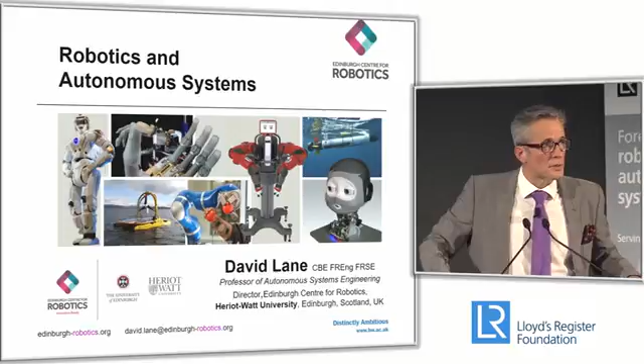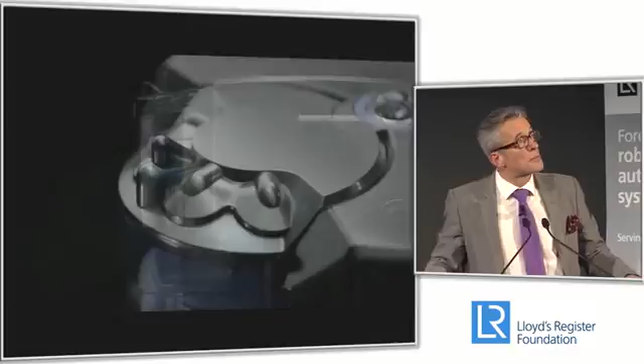So just to dance through a few examples, I'm going to cut some of this stuff out to keep it moving. Can we switch the sound off, please? Thanks, that's great. Just to show through some examples, by the happenstance of cut and paste from another presentation, these are all British examples, but I'm conscious that Lloyd's is a very international organization, so don't read anything into that.

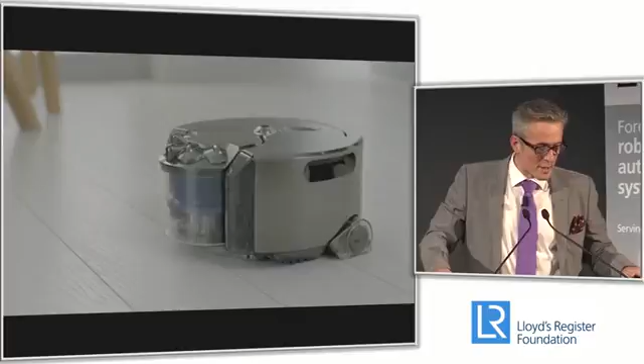Here's a great example of a robot and an autonomous system: Dyson's new vacuum cleaner. It has that thing on top there, which is its 360 Eye camera system, which it uses to navigate and map your room so that it can vacuum it successfully. If you talk to Sir James Dyson about this, he always jokes about what they're doing with all the data they gather from the vacuum cleaner back at Dyson HQ. You might care to think about that if you choose to buy one and use it in your house.

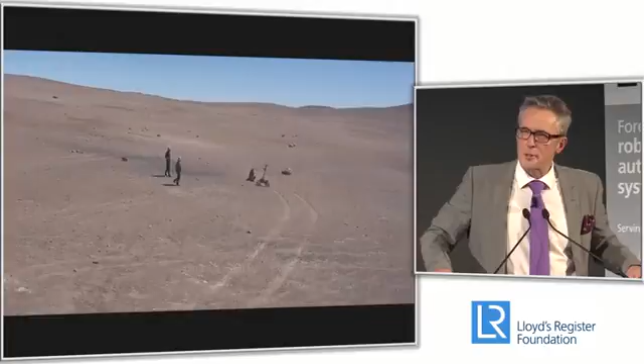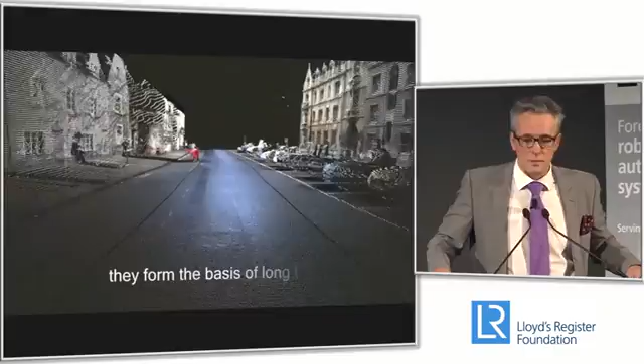Driverless cars are big. There's a set of trials going on at the moment in Milton Keynes. Ruth again was kind enough to point out that in the news last week, it was announced that they were being successful, avoiding both a dog and somebody playing Pokemon Go. So one of the issues with driverless cars is how well they can sense their environment and avoid obstacles. There's more trials going on later this summer in Greenwich—living lab type stuff. So these are coming.

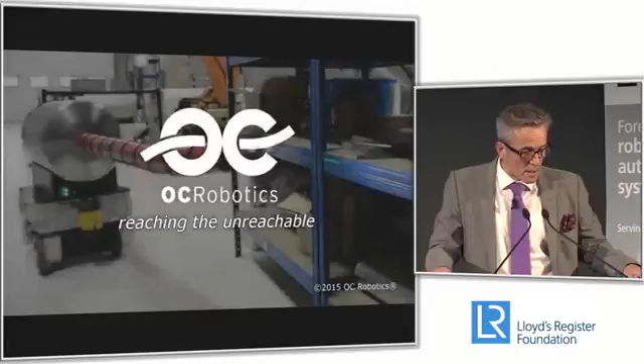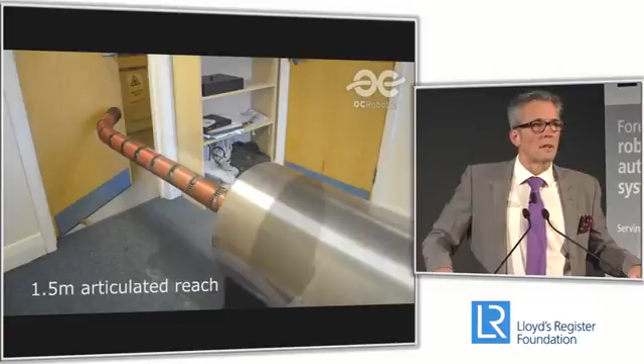OC Robotics, a British company, producing snake arms that are being used for inspection, and a lot of the kinds of integrity management and asset integrity solutions that require inspection use this kind of technology. We're getting better at it, making it cheaper, more affordable, and less power hungry.

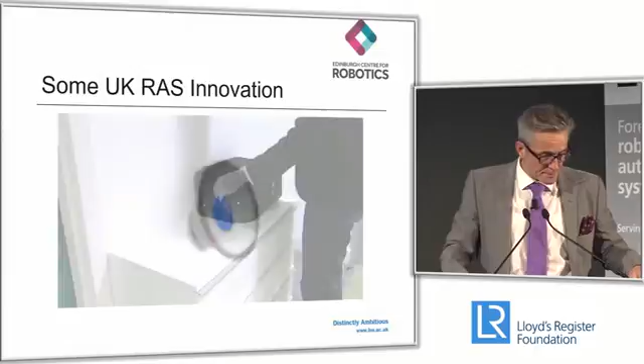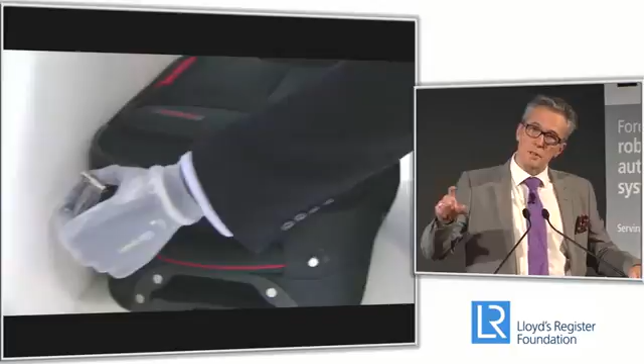This is an Edinburgh-based company, Touch Bionics, doing prosthetic devices, most notably hands, and this is one of their latest, the i-limb. It has some intelligence inside the hand—it's very difficult to build good sensor connections to your muscles so the hand understands what you're asking it to do. With very simple connections to your nerve, not directly to your nervous system but through your skin, you have to produce a series of different behaviors from the hand in order for it to do different operations. Touch Bionics have one of the most successful examples of that.

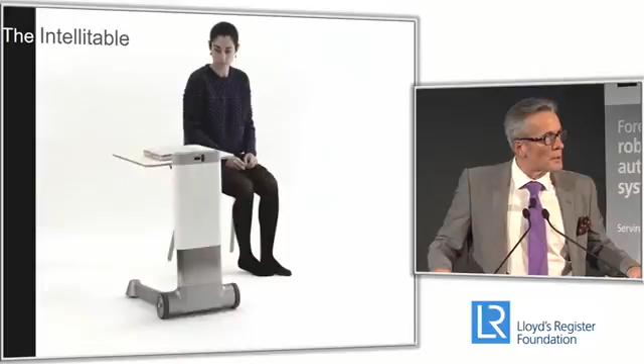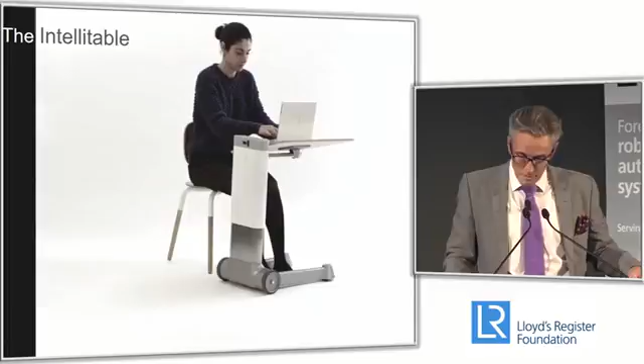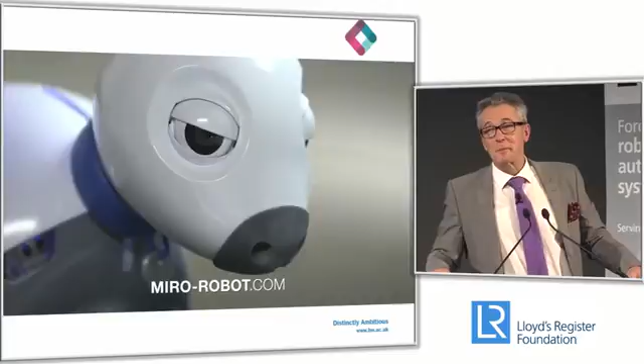This is a Consequential Robotics product, so I should be careful what I say—it's Intellitable. Sometimes the robotics revolution is revolutionizing things that don't move into things that do. This is an example of assisted living in a care home environment, and the next generation of this will have a small manipulator on it so it can pick things up and do things. Companion robots are becoming popular. We anthropomorphize our robots unbelievably, and there are legion tales of things that people do.

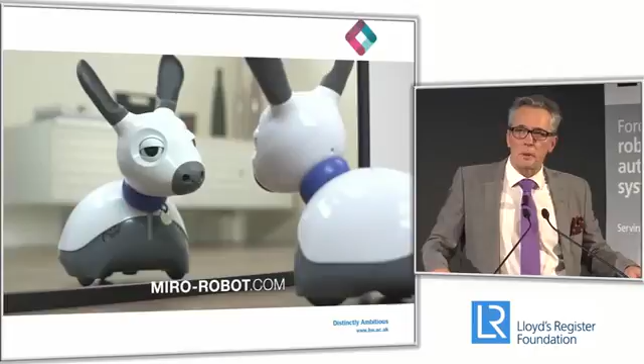Miro is just electronics and software, right? But isn't he cute? And there's a big market for this - digital pets, it's just too much hassle having a real dog, right? Watch this space for Miro.

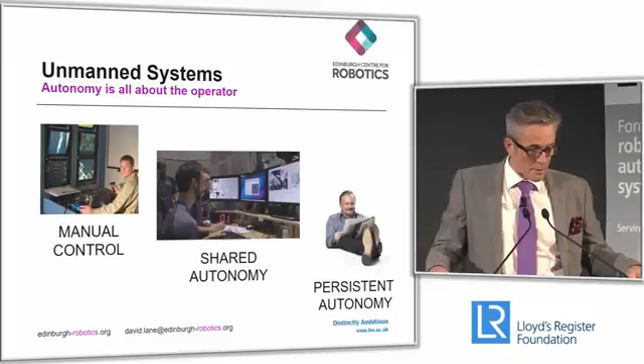One of the things that distinguishes all these kinds of systems is how you interact with them. One of the languages is autonomy is all about the operator - that sounds strange, right? So we talk about manual control, teleoperation, shared autonomy, and persistent autonomy. I'll try to indicate what I mean by that.

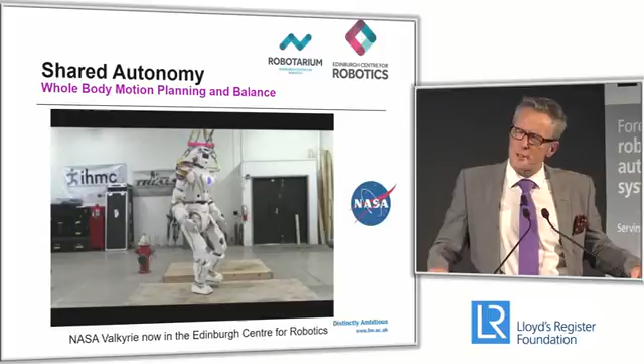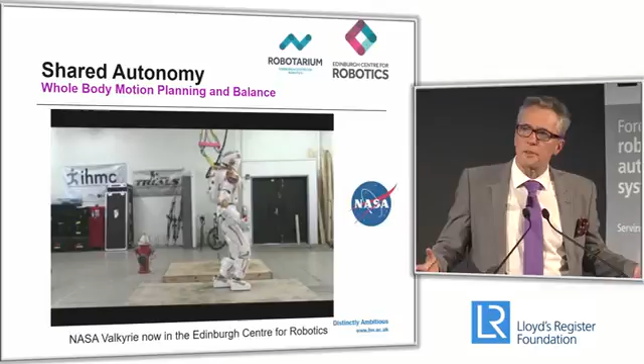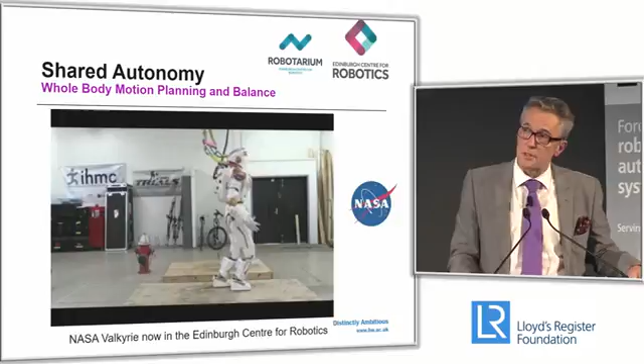Here's one of our new toys in the Center for Robotics - it's Valkyrie, a NASA humanoid. There's quite a lot of research going on in humanoids at the moment - actually, seriously, it's because it's fun, I think, and that drives a lot of creativity. But there are serious engineering challenges behind that about control of balance, controlling multiple things at the same time, force in contact and compliance, motion, velocity, balance of the whole body - and machine learning techniques and artificial intelligence are proving to be one of the ways this is being done successfully.

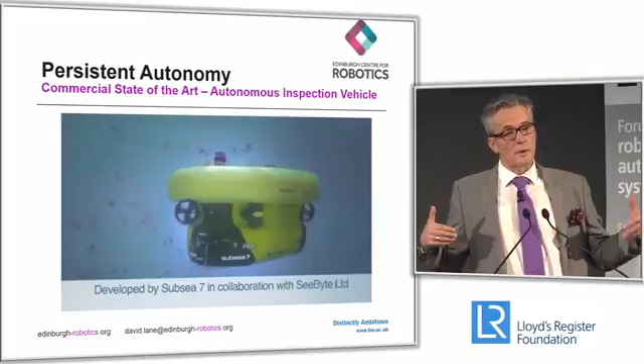That's an example of shared autonomy, because the operator is telling the robot what to do, but the robot has enough control software and sensing software on it that it can understand for itself.

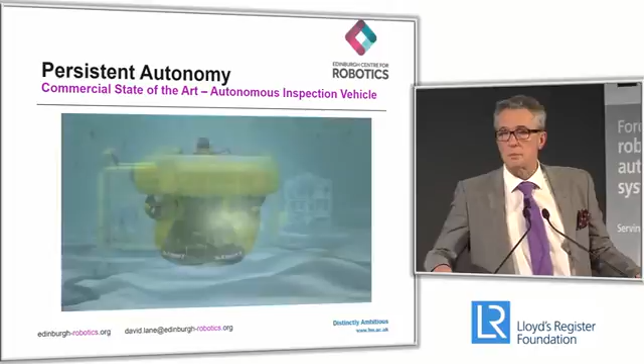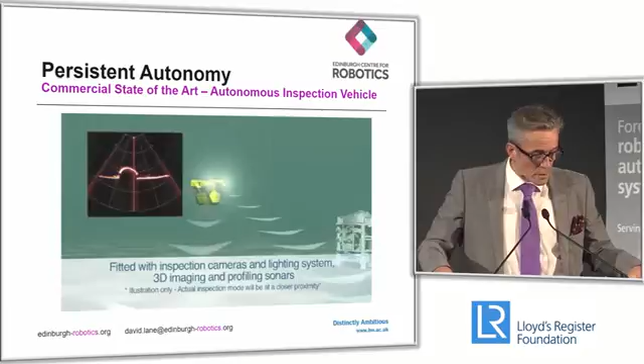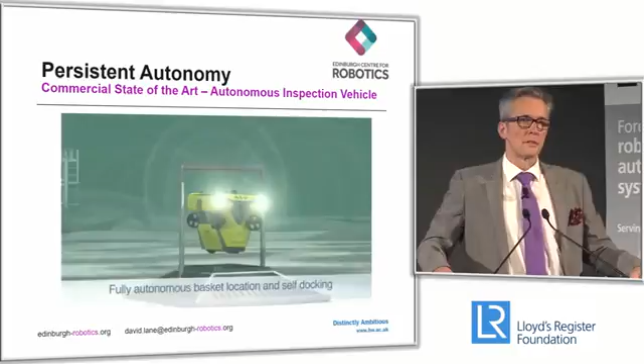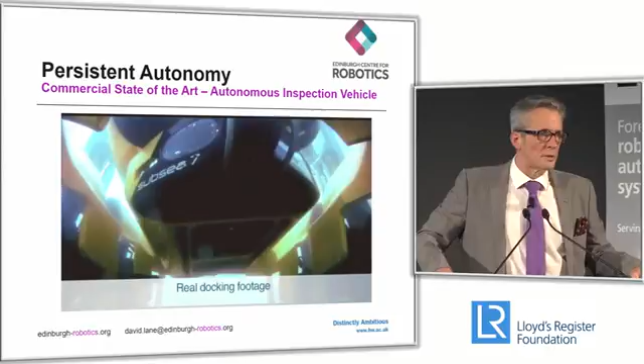This is a commercial example of persistent autonomy - this is a thing called the Autonomous Inspection Vehicle, a Subsea 7 vehicle. It's being used now for commercial work in the North Sea for Shell, doing inspection around floating production systems as the target market. It carries sonars, it carries video, and it's completely autonomous - it has no physical connection to the surface. And because radio waves don't propagate underwater, you can't really communicate with it other than getting heartbeat information about what it's doing, and maybe the odd JPEG snippet from one of the vision sensors.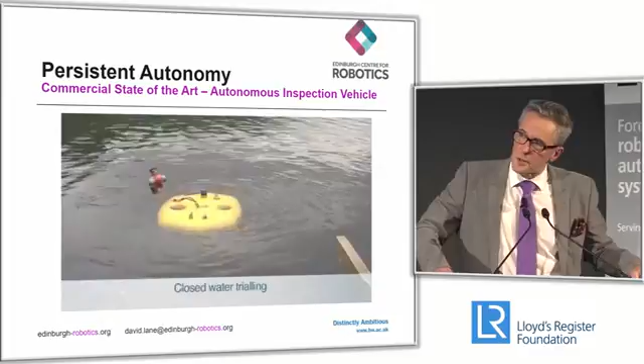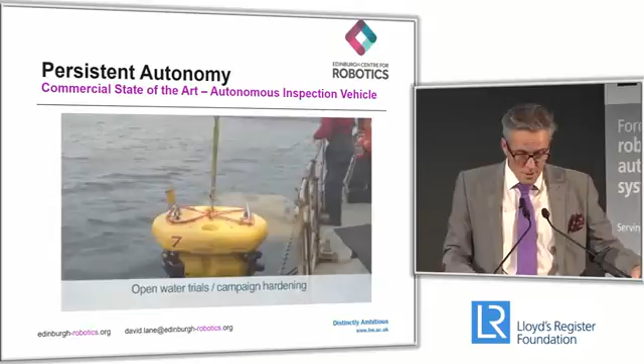So this system works autonomously. It has a map of the oil field in its brain, and it navigates its way around the oil field. It has a mission plan which it can adapt to some extent in real time in order to carry out the inspection mission. This is quite advanced, and in fact some of the most advanced examples of autonomous systems are in the ocean because of these physical properties.

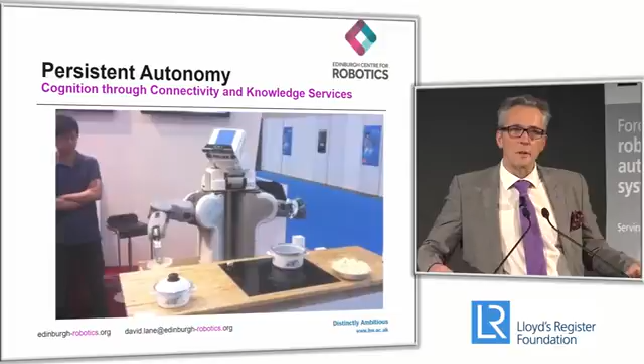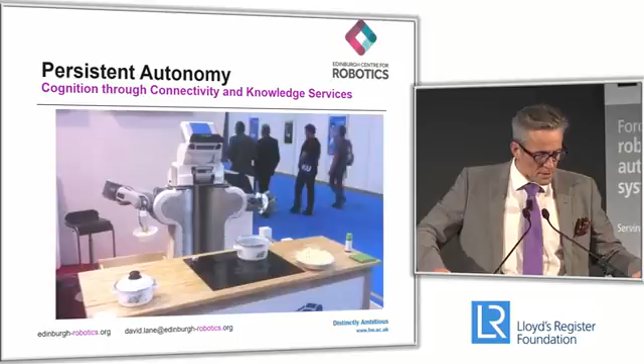I'm going to skip through this because time is getting in the way, but I want to talk about this one a little bit. This is actually a live demonstration - not from our group, although we have this robot and do some of this stuff - this is a different group from the Technical University of Munich. It was a live demonstration they were doing at Automatica, an industrial robotics fair a couple of years ago. This is PR2, the robot. It's got sensors - you can see the laser scanning away there - and it's got a stereo vision system, a Kinect. So it's mapping the kitchen in front of it, and it's making popcorn.

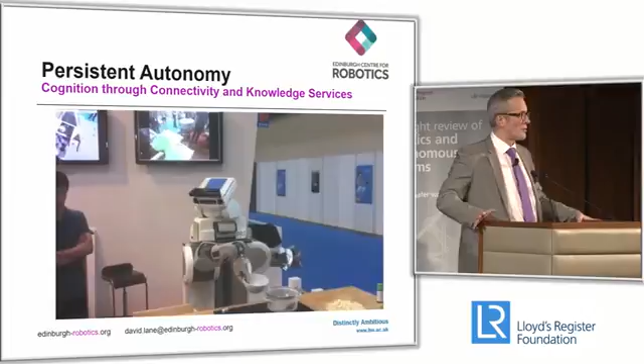The reason this is interesting and significant, apart from all the mapping and control and knowing where everything is, is that in order to understand how to make popcorn, this robot went off to the internet - it went to WikiHow, downloaded the recipe for popcorn, and then figured out for itself all the intermediate planning stages it had to do: where is the pot, does it have to open the drawer to get the pot out, and what sequence of actions it actually has to do. There's a lot of intermediate stuff that's not written down in the recipe for popcorn that it has to figure out.

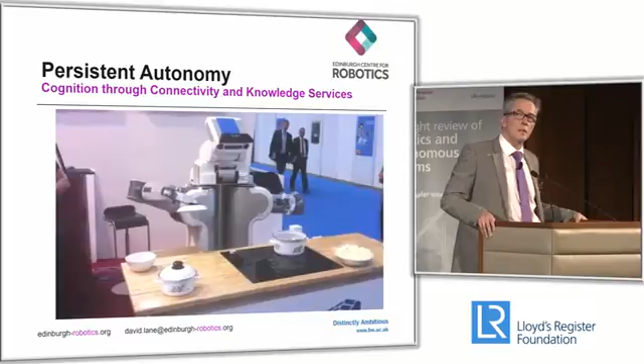The future of robotics, I think, is going to increasingly be that the hardware, the robot, becomes a commodity - it becomes like your smartphone. On your smartphone, what it does for you is a function of the apps it has on it, so you download the apps which make it do the stuff you like, that you want. It'll be the same with your robots in the future - you'll download the knowledge, like how to make popcorn, that gets the robot to plan for itself to do the things you want it to do. And you download the control algorithms and the sensor processing you need, and it'll be invisible to you, but it comes from the connected cloud.

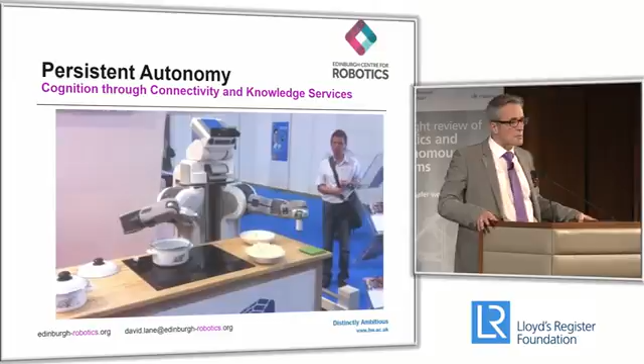So one of the driving features in all this is where does knowledge come from, where does data come from, that gives the robots the capability they need.

It's probabilities, it's a Markov process if you're into that kind of thing. That's a very powerful way of teaching robots behaviors that they can then go and do things later on. And we've applied that to lots of other things.

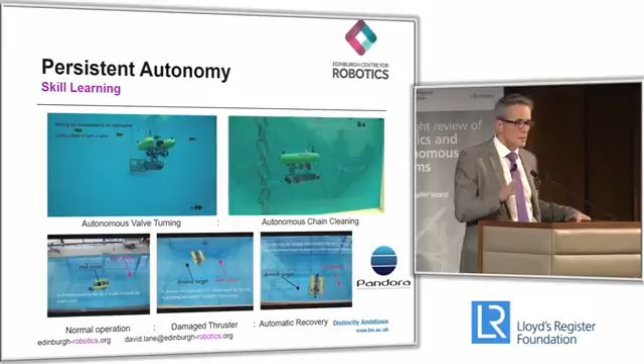Here we are cleaning an anchor chain, and it's having to deal with all the dynamics of motion, the reaction forces on the robot and the uncertainty that comes from that, and also some error detection and recovery, which I haven't got time to talk about here.

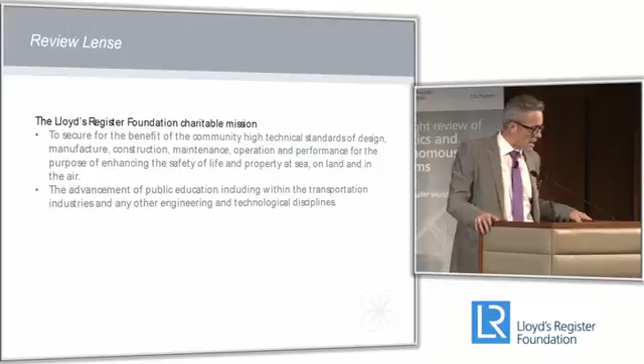The point I've made just now about doing it through Lloyd's Register Foundation's charitable purpose, I've already made that. So it's a different lens, actually, and that stretched us because we weren't used to thinking about that, and we had to get out of the mode of thinking about jobs and growth.

But what we recognized is the narrative about robotics and autonomous systems is not just coming from people from the research, engineering, industrial community. There are a lot of other communities thinking about it from the point of view of law, economics, ethics, sociology, jobs, public policy, and so on.

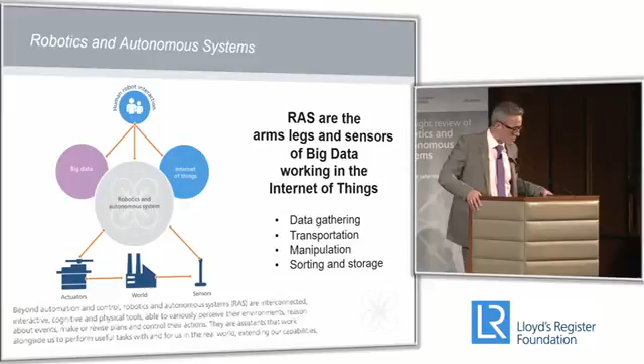I heard a lovely story, actually it's in The Guardian today, I think, or yesterday. There's a poor chap who bought himself a wireless-enabled kettle in the Internet of Things. It took him 11 hours to make a cup of tea.

He hadn't got the right drivers to get the Wi-Fi up and running, and it went viral on Twitter. So do watch out for that. There's a series of great comments about 'I can't get...' So it was a salutary lesson, actually, and one I take.

The key thing about robots that defines them for us is that they have some kind of extra smart processing software on them. It's not just the sort of industrial robot you'll see in a car manufacturing plant, which blindly does what it's been programmed to do. These are devices that have some active sensing, they can do the sort of stuff you saw in the videos. They're more advanced in control. They can sense their environment, make decisions, and adapt.

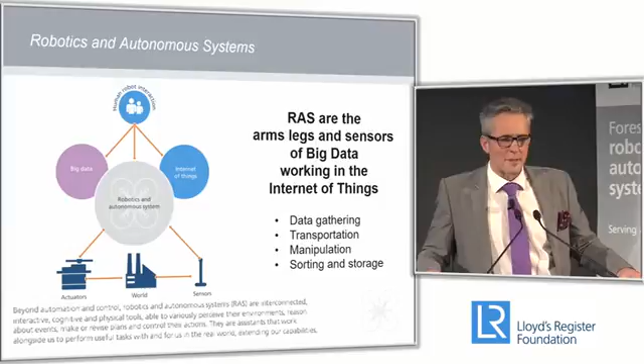That's the key thing that distinguishes this new generation of software and robots. It's actually all about the software - it's the software that makes what the oil and gas industry taught me to call 'dumb iron' smart, because most of the stuff in the oil and gas industry previous to that was. And there's a bunch of different things they're doing: gathering data, transporting things, manipulating things, and doing sorting and storage.

We sat and thought a little bit about the ways that robots can improve safety, and we came up with a long list about replacing the worker so the worker isn't in harm anymore, and supporting the worker.

One of the things we're very keen to get across is that robots aren't things that replace people. They're things that support people and complement people, giving them more time to do the things they're good at - quite often cognitive tasks, but not always, or interaction tasks. They're not uniquely devices that replace people and therefore replace jobs. I know that's not the Lloyd's piece, but it's very important to put across.

So they actively collaborate with people. There's lots of activities around doing inspections of assets and infrastructures. They can go into places where people can't - if the building's collapsed, you can send the robot in there. You can drill with a robot; you can't drill with a person. And in safety-critical operations, the robot can have some role in assuring the products that are produced, or in manufacturing.

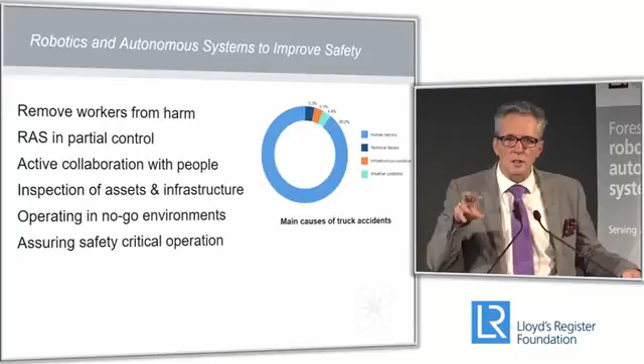We were also keen to get across the difference between a robot and an autonomous system. We included autonomous systems deliberately because there are examples of this kind of smart software that don't control physical things. In the financial industry, for example, this very fast trading that goes on in milliseconds or fractions of a millisecond - those are autonomous systems doing that. They don't have a connection in the real world; it's all data basically, but it's the same thing going on behind the scenes. So we included that in our definition.

You can't see this very well - the colors haven't come out. We spent a lot of time thinking about data, and curiously, if you look across the report, a lot of it is about data and knowledge. It's not just the robot, it's not just the physicality of the robot - it's the data and the knowledge that become some of the issues and areas we think the future requires us to focus on when we get to the recommendations part.

Thinking about where data comes from, where data goes, what you can do with data - it comes from the asset, whatever the device is, and it comes from the inspection robots that go around it. Drones are everywhere - I didn't have an example of them, but they're probably one of the most prevalent new kinds of inspection devices that everybody's using at the moment.

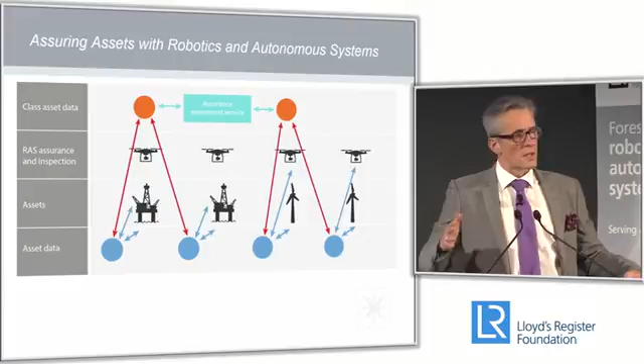You find that the data you gather for the class of asset - the kind of oil rig you're looking at, or whatever the system is, or building, or railway - sharing that information across different examples of the same asset is actually quite a powerful thing to help with the assurance task. So when we thought about how to assure assets with these robotics and autonomous systems using those sources of data, we thought hard about the importance of being able to aggregate and interpret that data. That's a very important thing.

Who owns that data? That's actually an issue, because people who have data showing their asset when it fails are reluctant to share that, for very good reasons - very often commercial, but to do with safety as well. But it could be in the public interest to do that, because safety could be enhanced as a result. And if you're going to aggregate, interpret, own data, and share it, then you have to have standards for that.

And there's still space for standards to emerge to do that. In the self-certification and insurance space, I think this was a very interesting idea that came out, that if you've got smart software, you can build systems that can self-certify. They can, to some level, monitor their own health. And that has quite a profound effect on how the assurance and insurance industry are going to work.

It means that not all the certification and assurance is done as a batch process at a periodic interval dictated by some statistical criteria. You can do a lot more of it only as necessary, based on the self-certification the system's doing in real time. But set against that, if you put smart software in there to do that, robotics and autonomous systems themselves have to be certified. So there's no point putting in a system that's less well certified than the asset you're dealing with, because then it'll be the limiting factor in the overall assurance. So there's a thing you have to think about, how you introduce the system.

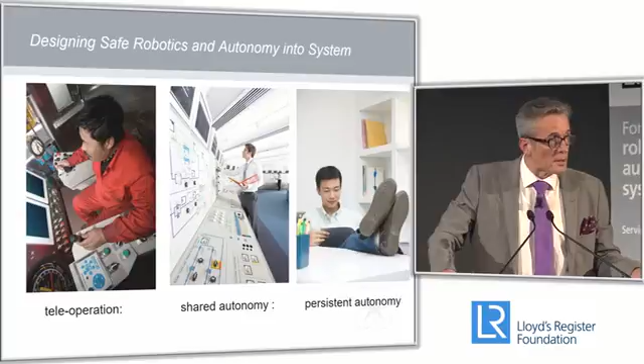So what do you do about that? How should you - if you have shared autonomy, the operator is still situated with the robot, because the operator's doing the cognitive piece, the robot's doing the controlling and sensing piece. In persistent autonomy, like a self-driving car, if it just hands control back to the operator, they'll probably do the wrong thing. So that's an issue, and how we deal with that has to be thought about and developed.

There are issues about data and knowledge privacy and integrity guidelines, so that we make good use of our RAS data and knowledge that we need to think about. And the privacy issue - I was half joking when I talked about, I'm sure Dyson don't have data going back to their headquarters, right? But you get the point.

And what should you do about that? Should you regulate every drone that has a camera on it? You can't own or operate a drone with a camera unless you have a license - is that going to work? Or is that regulation going to become something that gets in the way of the adoption of the drone for whatever the applications are? Those are things that need to be thought about in order to move forward.

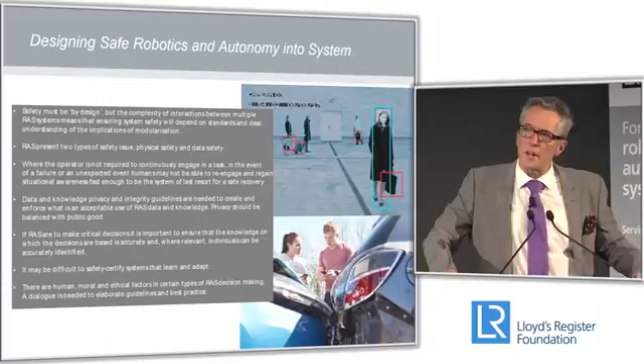Just to the earlier point about the robot which has been assured and is safe but works in a changing world - one of the things coming out of AI, artificial intelligence, is systems that learn. So we can build systems that learn. We can put AI onto robots, and they can learn how to do things. They can learn how to understand things in data. They can also learn sort of indirectly things about the behavior of other things they observe, to then predict what they're going to do next.

In all those learning applications, how do you make sure that the robot learns the right stuff and not the wrong stuff? There were some examples in the discussions about learning from Facebook, which isn't quite the right domain, but it highlighted that there's lots of things you can learn from Facebook - but they might not be the right sort of things that you want a system of any sort to learn. So again, we need to think about that and how to do that.

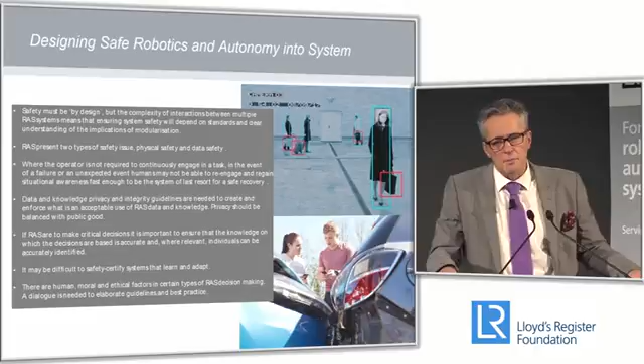And how do we certify a system that learns? If it's going to adapt what it does and how it behaves based on the environment that it's in, and it's not been predefined, then that kind of goes against the whole grain of what assurance is all about, where you have a specification, it's supposed to do this, and you make it do it, and you guarantee that happens to some level. So there's some deep thought needed about how much learning should you put on a robot, given that it has to work to a certain level of assurance and certification.

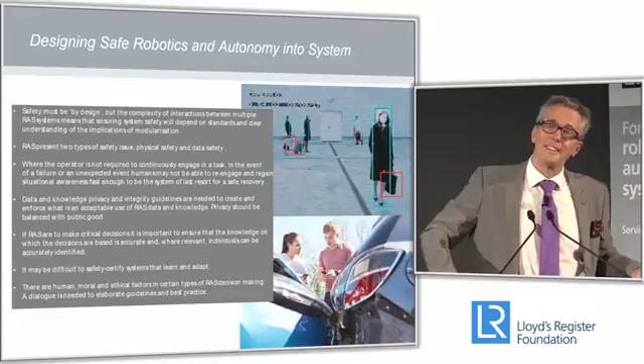And there's a lot of human, moral, and ethical factors that go into the sort of decision-making that RAS are involved with. The classical one that everyone always talks about is the car - the car's driving along, it's going to crash, and you've got the president and the baby, which is the one that you should hit. And I guess it depends who the president is, based on recent events in North America.

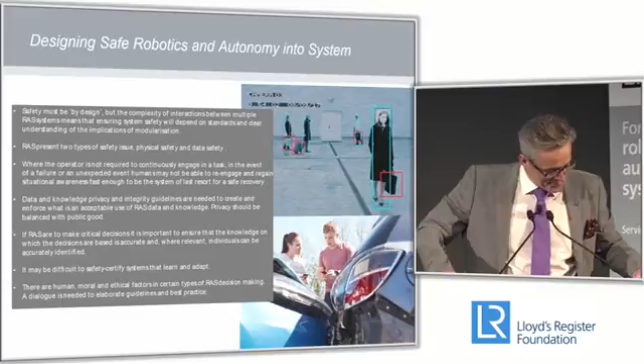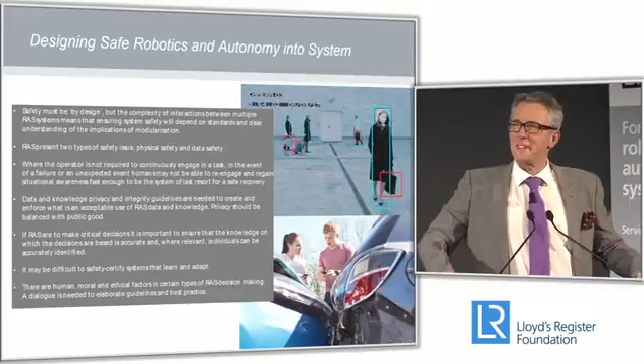And future events, actually. But you understand what we're saying - if you don't think about this, then the people who will decide that are the engineers. Now, engineers are wonderful people, but they may not make the right ethical choices in these things. We do need ethical guidelines to think about how to do this kind of stuff, and it's something that the public have to contribute to. It's not just something that a mixture of people in - well, it used to be a smoke-filled room, but we don't do that anymore - should decide. So those are things that need thought.

And so building public trust is something that we need to do. I think there's no doubt that the sorts of trials that are going on in Milton Keynes and Greenwich with the self-driving cars are great, because people are getting to see the robots, see the systems being used, and there's nothing like seeing them and working with them to build that trust.

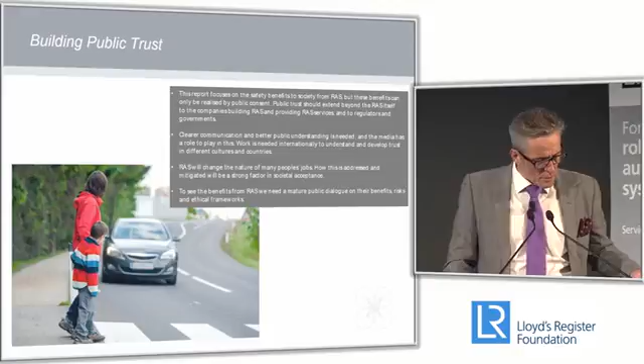People also have to believe that the companies manufacturing this stuff are actually ethical. We don't always believe that some of the large multinationals behave ethically, but we don't know, of course, it's all rumor. We need to try and develop that with robotics companies as they develop, and have a narrative which isn't just about the loss of jobs and growth, that alarmist piece, which is the way it's been driven largely in the public at the moment.

There's a skills piece that we've put in there, and I think that comes with every review. There's certainly a lot of STEM work to do in schools, supporting primary school teachers. We've done a little bit of this, putting robots into primary schools with kids age 8, 9, 10, and it's very successful, provided you give them the right support in terms of equipment and demonstration videos and so on.

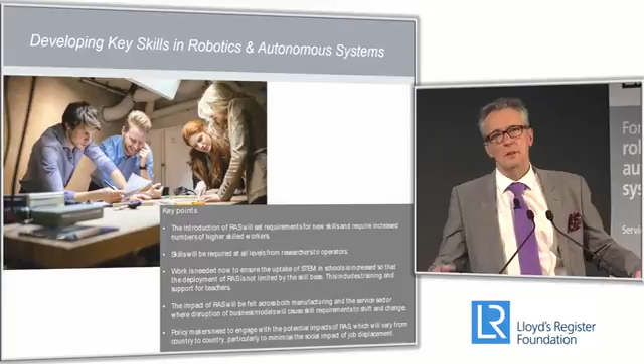There's a lot of training and skills development for PhD students and people who've got software and algorithmic skills. And there's even retraining for those who are displaced and have lost their jobs. It's not about displacing them, but how do you upskill people so they can still be beneficiaries. So there's a lot of work there.

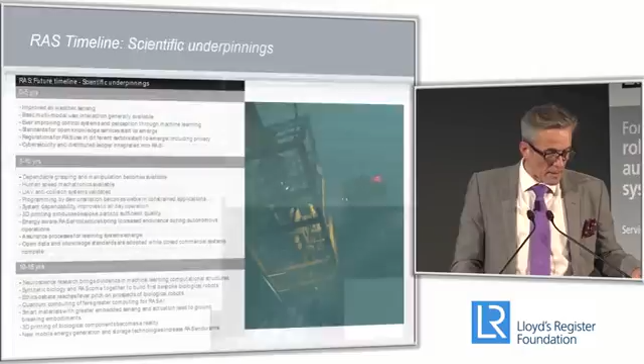I'm not going to go through it here, but we did a lot of thinking about the impacts and applications and some of the scientific underpinnings. Again, you can't read them here. Certainly there's some interesting developments in the long term, quantum computing and so on.

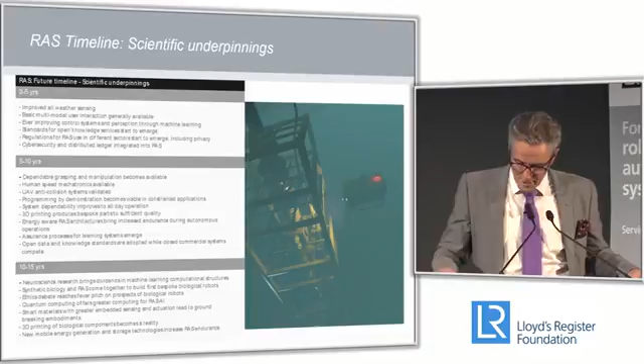There's things like synthetic biology starting to come together with robotics, and we can imagine 3D printing biological organisms in 15, 20 years' time that themselves will become biological robots. So think about what the ethical implications of that are going to be, and how the Twitter storm will go with that kind of thing.

There's things to do on assurance and certification. How can I build assets that self-certify, and what are the issues in that? One of the nice things about that, although it's quite a high-level ambition, is that in order to do it, it involves quite a lot of deep technology work. So it's back to engineering again, which for me, is good.

We have to be able to do fault detection, diagnosis and prognostics on our assets in a much better way than we do at the moment, and be much more joined up about how we use data in smart spaces. And how do we do this assurance piece about learning systems, with a system that can change what it knows, how it behaves, the logic of what it does as it adapts? How do I assure that?

There's the security and resilience piece. The cybersecurity point I made, we need to make sure all those techniques being developed for protecting computers from being hacked are installed in our RAS so they're protected. And the whole thing about software systems integrity, we need to build that in a cost-effective way, because you can do it, but it's very expensive. Can we be leaner in the way we do that, and can we do it so that all the processing power on the robot isn't being used to keep the integrity systems going and all the encryption, rather than carrying out its desired function.